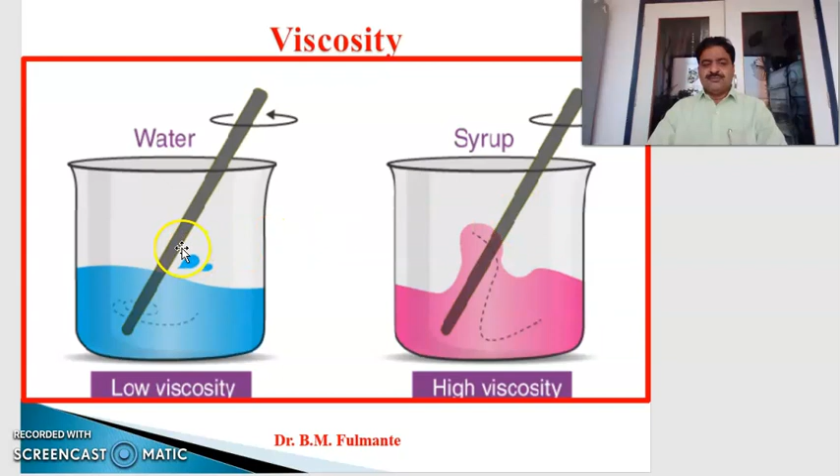In last lecture, number 1, we have seen which fluids are more viscous as compared to other fluids. And we also saw the concept of viscosity. Syrup is more viscous compared to water. We have also seen the mathematical expression of viscosity, and this eta stands for coefficient of viscosity.

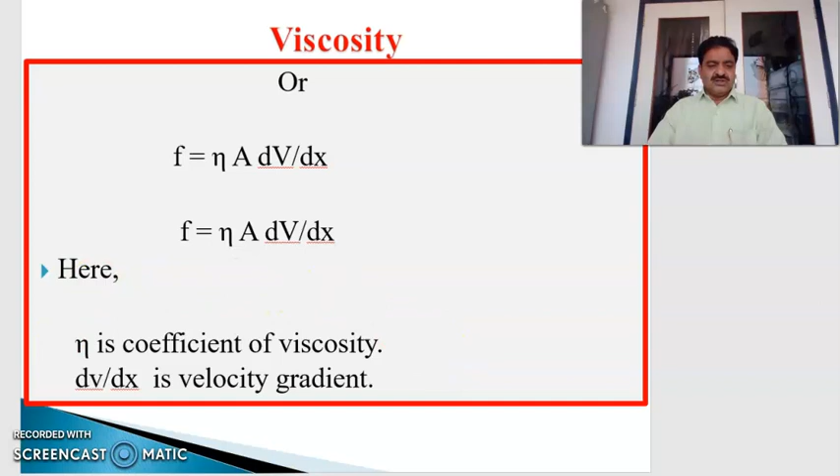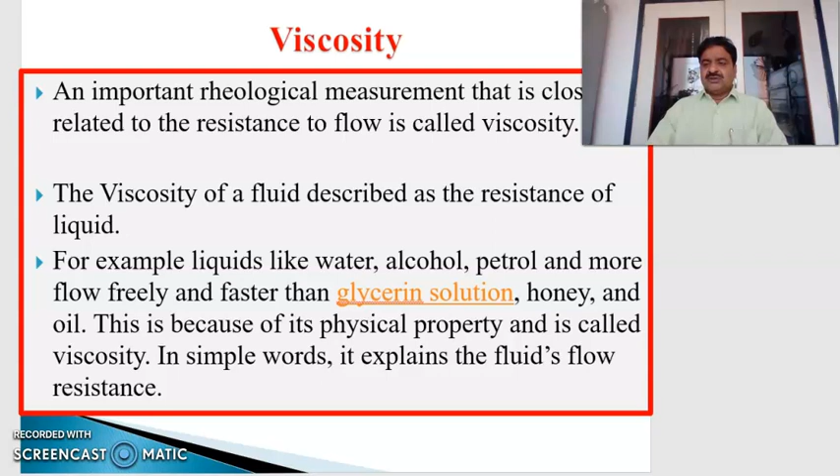We have also seen the important concept that viscosity simply explains the fluid's flow resistance. Up to this we arrived in last lecture. Now we turn to lecture number 2 about viscosity.

A very important question most people don't ask, but some students may ask: why even measure viscosity? The concept of viscosity is clear. Then the question arises, why is there a need for measurement of viscosity? Surely there is a need, but why?

The main reason is that the viscosity data on the material gives manufacturers a chance to predict how the material will react and behave when consumers interact with it. The most simplistic formula for measuring the viscosity is shear stress upon shear rate. Shearing stress upon shearing rate.

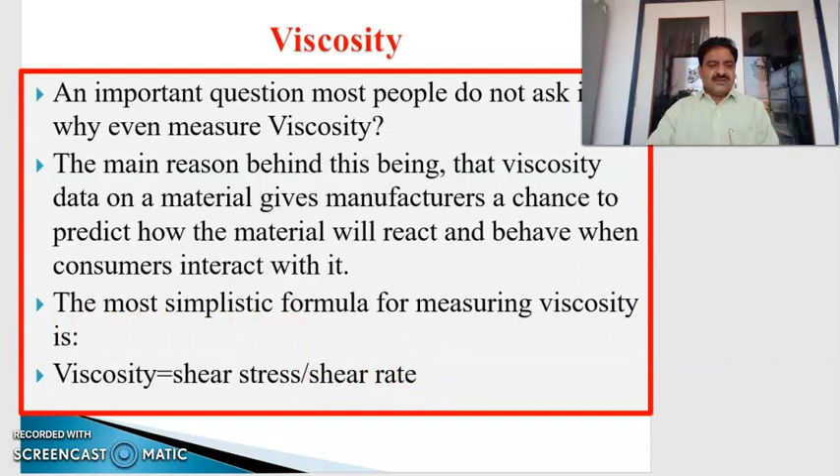Then, what about critical velocity? Critical velocity of a fluid. Whenever fluid flows, water, glycerin, kerosene, oil, whatever may be the fluid, it will acquire a greatest velocity with which fluid can flow through a given conduit without becoming turbulent.

You may ask again, what is turbulent flow? Turbulent flow and streamline flow, that concept we are discussing in the next slide. So at present you remember the greatest velocity with which a fluid can flow through a given conduit without becoming turbulent.

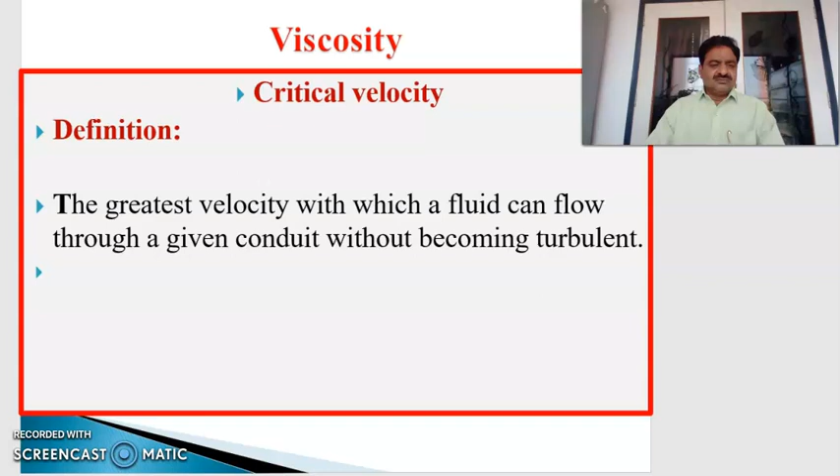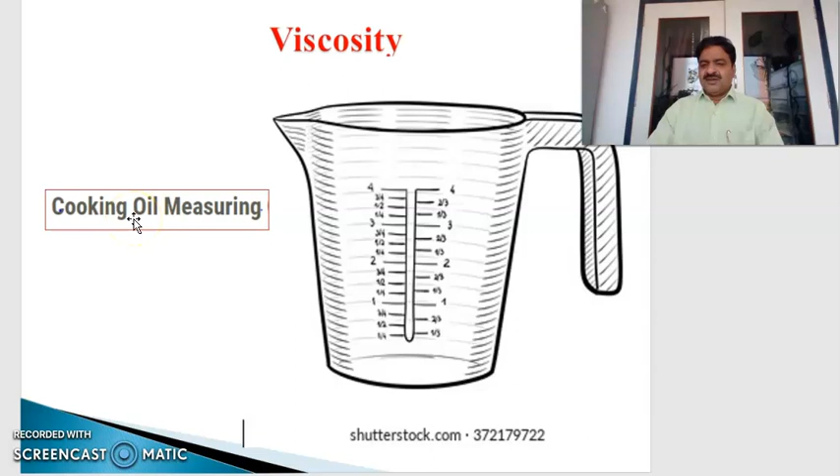Now a very interesting picture. What is this? This liquid, what does it show? Here drops are forming. It doesn't get easily poured. It means it is denser, we say. Instead of saying more denser, better to say it is a viscous liquid.

It shows the nature of viscosity of a liquid. From this figure, you will come to know that it is not easily going to flow. There is more opposition to the flow of this liquid between adjacent layers.

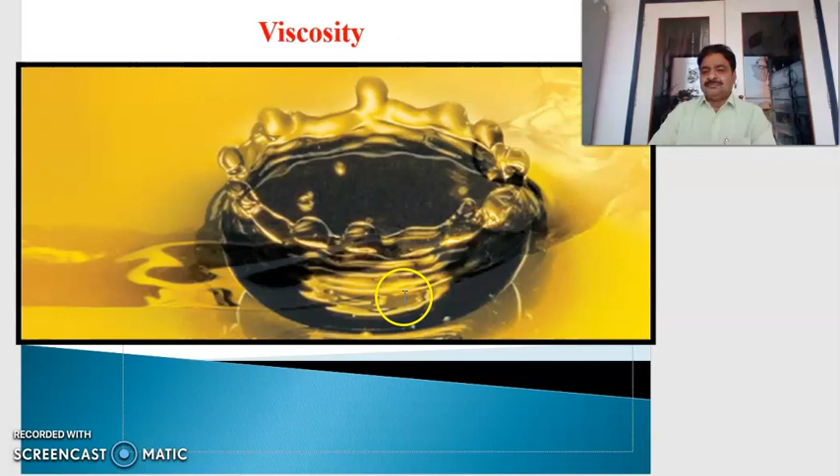Now, let's turn towards the introductory part. Viscosity is nothing but a quantitative measure of fluid's resistance to flow. Then what are the types of viscosities? There are different types: dynamic, and another one is kinematic viscosity. Among these two types, first we shall see dynamic.

Dynamic viscosity is also said to be absolute viscosity. Dynamic viscosity, denoted by eta, of a fluid is a measure of the resistance it offers to relative shearing motion. Remember this point: the resistance it offers to relative shearing motion. This measure of the resistance of a fluid is said to be dynamic or absolute viscosity.

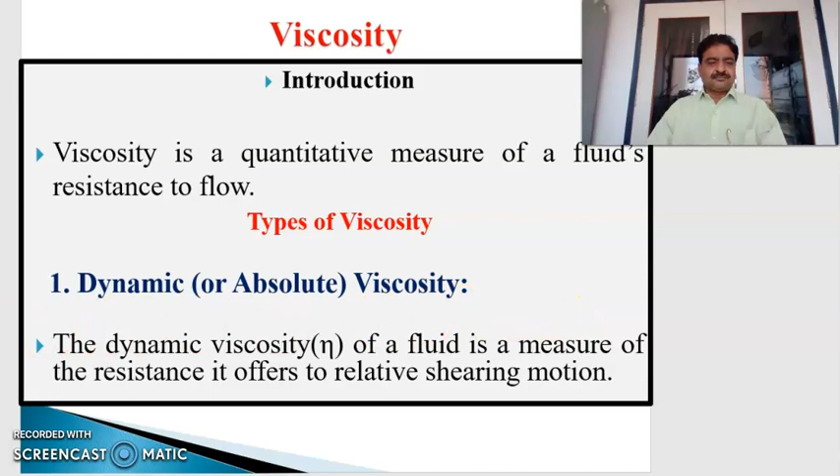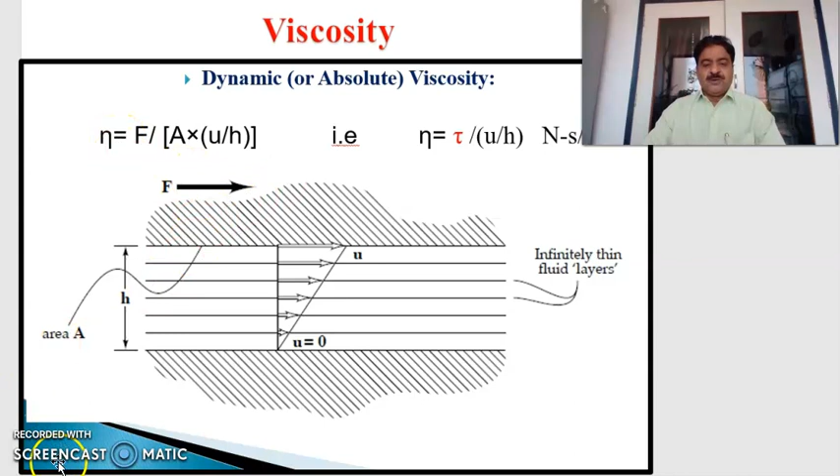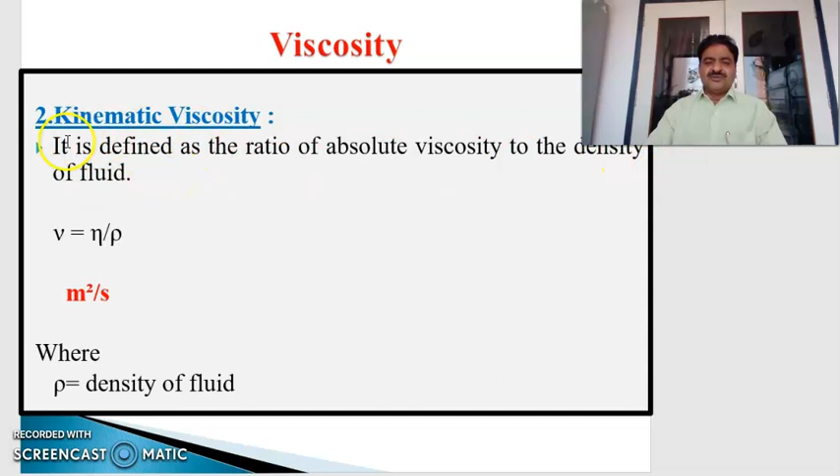Now let's turn towards another type of viscosity, that is said to be kinematic viscosity. It is defined as the ratio of absolute viscosity to the density of the fluid. Very easy to remember. What is it? It is nothing but the ratio of absolute viscosity, which we have earlier seen in type number 1, to the density of the fluid. Again, question arises, what is meant by density?

Density, as its mathematical expression, is mass upon volume: density is equal to m by v. The ratio of mass to volume is nothing but density. So such a ratio of absolute viscosity to the density of the fluid is said to be kinematic viscosity, in meter square per second, where rho is nothing but density of the fluid. What is this rho? It is the density of the fluid.

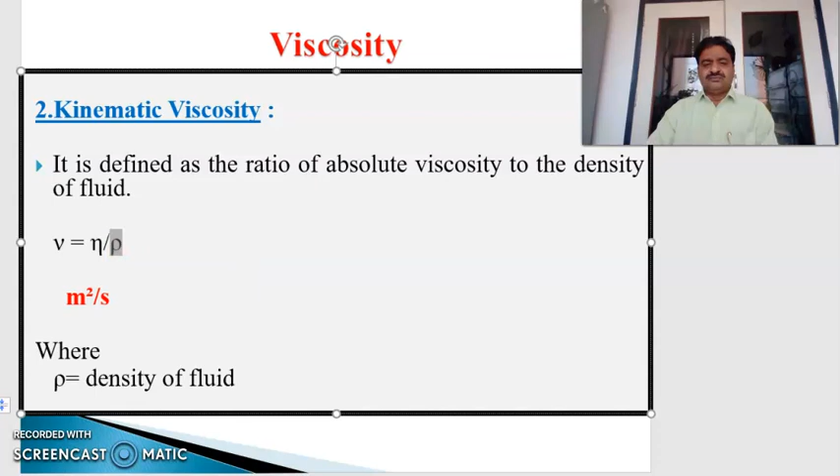Now, if we think about the viscosity measurements, capillary viscometers are utilized to measure the viscosity of the liquid, viscosity of the fluid. It gives the kinematic viscosity of the fluid, and it is based on Poiseuille's law for steady viscous flow in a pipe. There is a law, say Poiseuille's law. What is that law? Later on we are going to discuss.

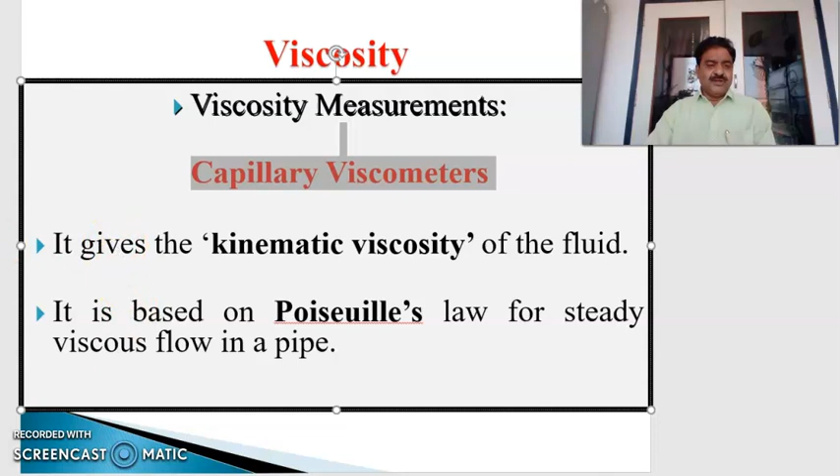So kinematic viscosity of the fluid can be obtained, or can be measured, by using this capillary viscometer. Capillary viscometer is used for the measurement of kinematic viscosity. It is based totally on Poiseuille's law for steady viscous flow in a pipe. I will show you this capillary viscometer. Capillary viscometer is such a type of tube, as shown in picture.

Here suction pulls fluid to start mark, and here stop mark. This is the capillary section, and time is to be set first. Here start mark is shown, and here stop mark. Once the start mark is there, then we have to start the stopwatch, and whenever the fluid reaches this position, that is stop mark, one has to stop the stopwatch. Then we can measure these levels, and then by using this formula we can obtain the viscosity of the fluid.

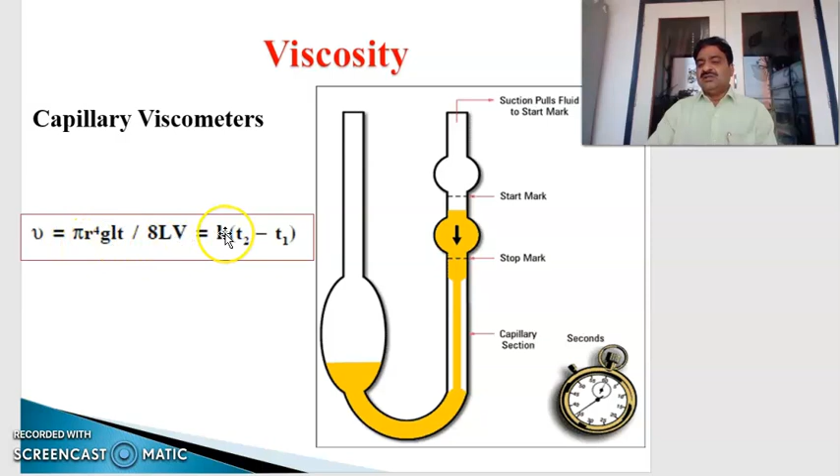Here formula is pi r raised to 4 g h t upon 8 L V, or it is equal to constant K into T2 minus T1. Then question arises, what is this pi? Pi is constant. What is r? What is g? What is h? What is t? What is this capital L? All these things.

Here nu is the kinematic viscosity in meter square per second, and small r is the radius of the capillary, and h is the mean hydrostatic head. Small g is the Earth's acceleration, or acceleration due to gravity in meter per second square, and capital L stands for the length in meter, I mean capillary length in meter, entire length. V is the volume of the fluid, how much volume of the fluid is going to flow through this.